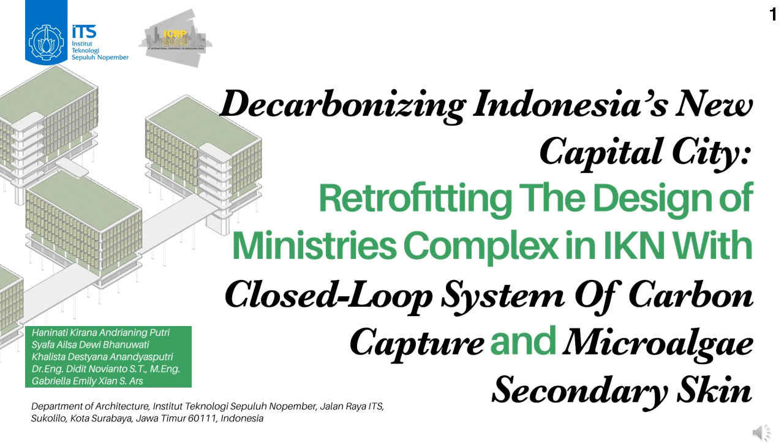Decarbonizing Indonesia's new capital city: retrofitting the design of the ministries complex in the IKN with a closed-loop system of carbon capture and microalgae secondary skin. Indonesia has finalized the agreement to shift its capital city to East Kalimantan, a move that will result in substantial carbon release.

Comparing this to DKI Jakarta, Indonesia's current capital, which emits 206 million tons of carbon annually. When extrapolated into individual contributions, the anticipated residents in the IKN area will generate a certain amount of carbon. With a projected population of 1.6 million people by 2024, carbon emissions will multiply by 11-fold. Despite varied efforts planned by the IKN regional government, including reforestation, renewable energy adoption, and energy conservation, these measures might not suffice to counter the alarming rate of carbon emissions.

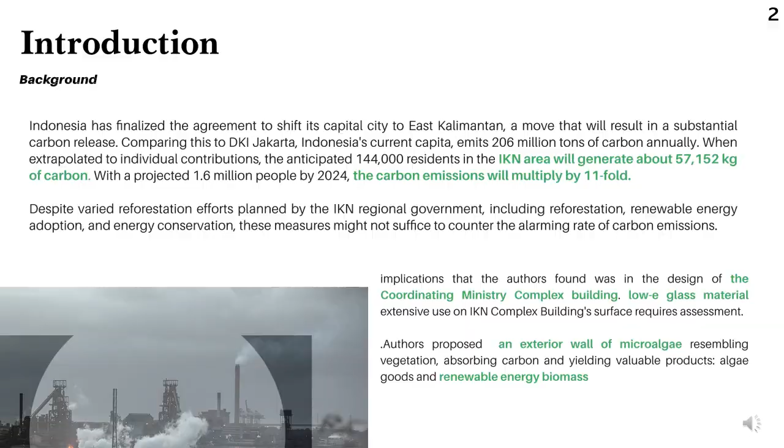One implication the authors found was in the design of the coordinating ministry complex building, where low-E glass material will be used extensively, which requires assessment. The authors proposed an exterior wall of microalgae resembling vegetation, absorbing carbon and yielding valuable products such as algae goods and renewable energy biomass. This leads to a literature review on microalgae and photobioreactors.

Here are the characteristics of microalgae: as long as there is sunlight, microalgae can photosynthesize and grow in saltwater, brackish water, and freshwater. Microalgae is abundant near IKN, located only 100 kilometers away from the zero point of IKN at Muara Badak waters.

Photobioreactor characteristics: a photobioreactor refers to the process of utilizing sunlight to convert organic materials into biomass. The application of algal photobioreactors is the panel-type photobioreactor, which makes effective use of land such that it can be integrated with the facade. The length of the panel can vary according to the desired volume and surface area, but the depth should be constant as it relates to light penetration.

Light is a major factor for microalgae growth in photobioreactors and should be given special emphasis in the design of PBR facades. Solar trackers with automatic control units can be used for tilt angle adjustment, and sprinklers are used to cool down the PBR volume.

In Indonesia, Martokusumo et al. explored microalgae facades for the ITB Innovation Park in Bandung in 2017.

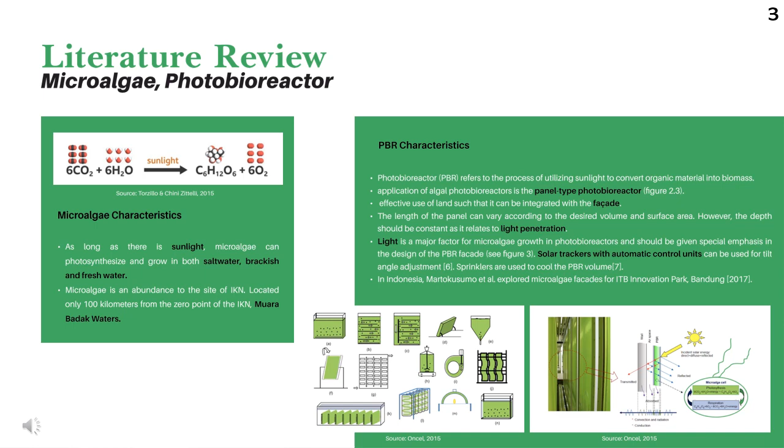Literature review on direct air capture: direct air capture technology extracts carbon dioxide from the air to create various products like carbon neutral fuels and food, aiding in achieving net zero emissions.

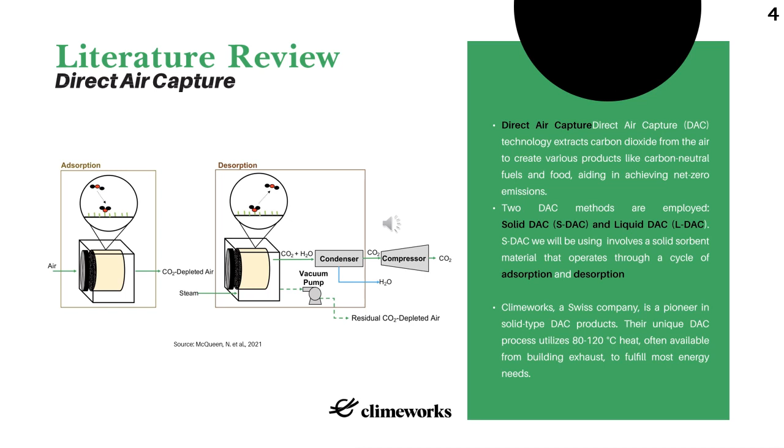Analysis and discussion from IKN's current plan: implementing low-emissivity glass on IKN office buildings offers advantages. Low-E glass serves as solar control, shielding indoor spaces by reflecting excess solar heat, while preserving natural sunlight access and promoting natural lighting indoors.

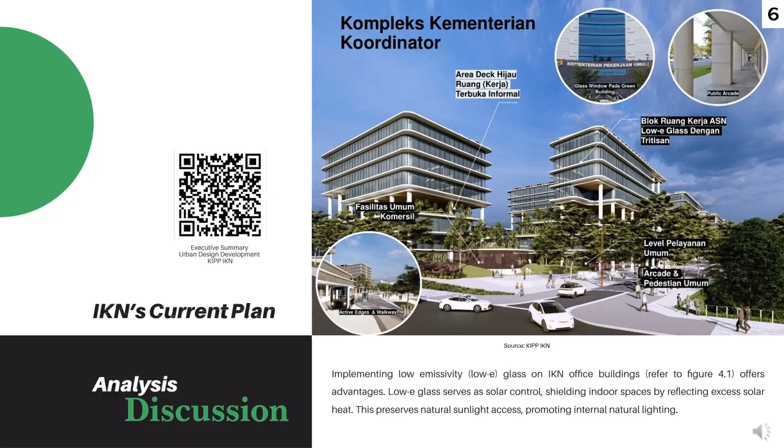Discussion on cutting carbon emissions, including with low-E glass, references a UK case study in a four-season climate, mirroring Indonesia's warm, humid conditions, especially during the summer. The graph on the slide shows the carbon emission comparison between different types of glass in the UK.

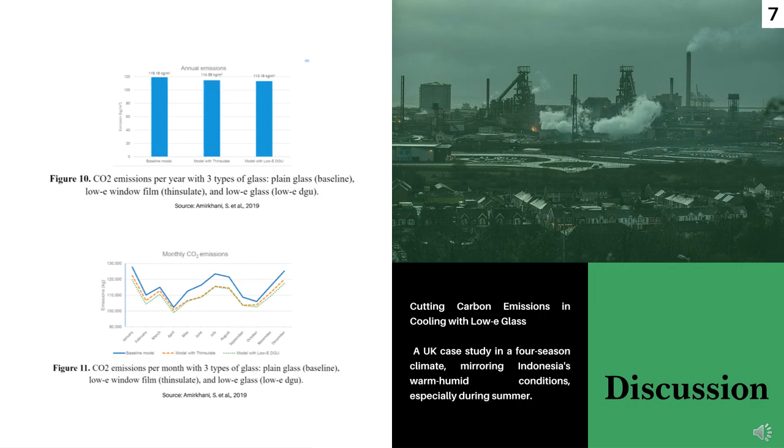Discussion on cooling load assessment: assuming a common VRF system is used, emitting a stated amount of CO2 per 1 million BTU over 20 years, the BTU load per floor is as stated, and each floor will produce a stated amount of CO2 for air conditioning, or a stated amount of CO2 per building. We can then compare the carbon reduction from air conditioning achieved by low-E glass versus the carbon reduction achieved by direct air capture.

The use of low E-glass will reduce carbon emissions by a stated number of tons of CO2 per 20 years, or a stated number of tons of CO2 per year, reducing carbon emissions by 4.1% to 5.3%.

To capture 1 million tons of CO2, the DAC system will require 0.4 to 66 square kilometers of land. Its application to IKN, with calculations stated in the slide, shows the buildings have the potential to reduce carbon from a stated number to a stated number of CO2.

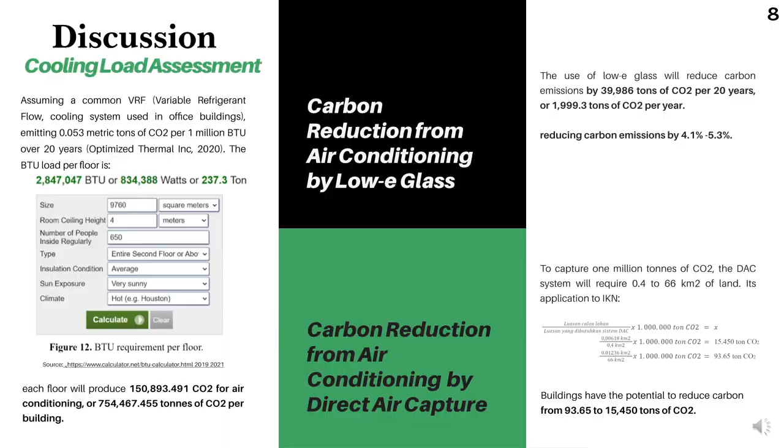Availability of microalgae in East Kalimantan. A Berau water study found diatoms as the dominant microalgae. Results also connected microalgae prevalence with chlorophyll A levels in Kalimantan Berau waters, as highlighted by Aryawati and Toha in 2011. This supports the suitability of microalgae solutions aligning with local resources.

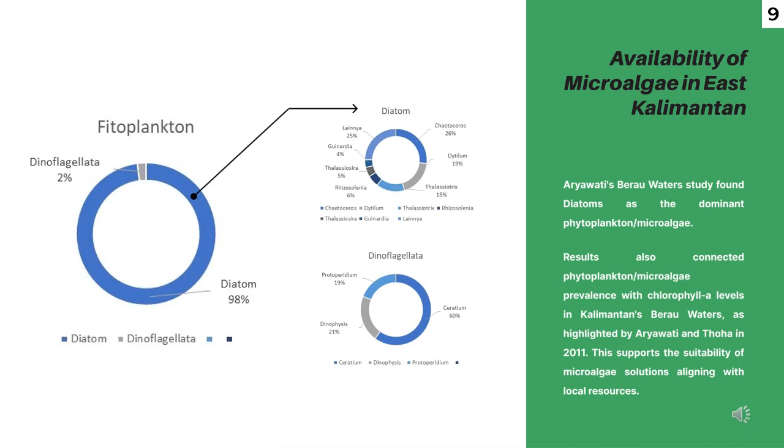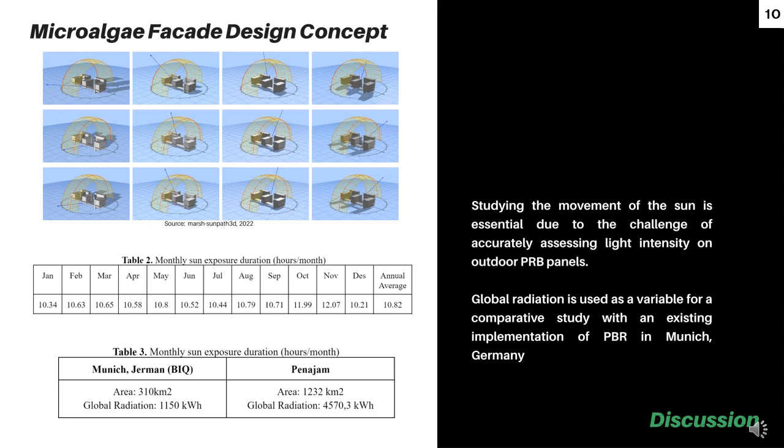Microalgae facade design concept: studying the movement of the sun. This is essential due to the challenge of accurately assessing light intensity on outdoor PBR panels. Global radiation is used as a variable for a comparative study with an existing implementation of PBR in Munich, Germany. The calculations are stated on the slide.

A conceptual diagram shows how the DAC and PBR technology will be implemented in a closed-loop system. These are the steps to the process. First, the DAC system captures CO2 from air and transports it to microalgae PBR panels via CO2 pipeline.

Second, nutrients, sunlight, and CO2 enter microalgae PBR panels, generating heat, microalgae, used water, oxygen, and biomass. Third, generated heat will be redirected into the DAC system. Fourth, the produced oxygen is released into the surrounding air.

Fifth, biomass can be processed to become electricity, which, according to the IKN plan, can be channeled back to JPCI IKN Smart Power Grid so that it is stored for shared use by the city.

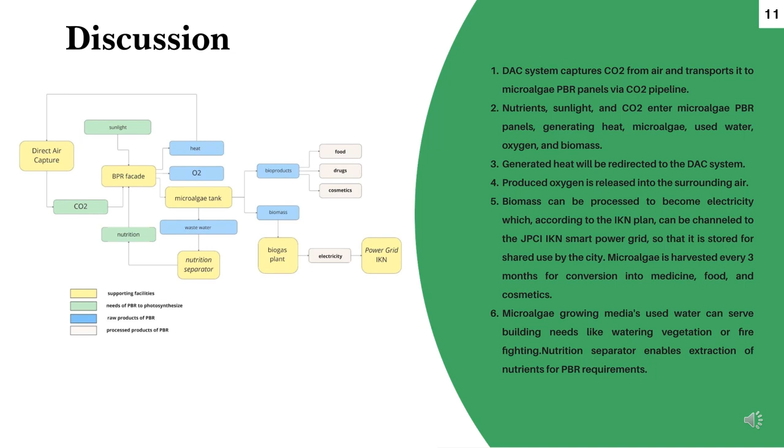Microalgae is harvested every 3 months for conversion into medicine, food, and cosmetics. Sixth, the microalgae growing media's used water can serve buildings' needs like watering vegetation or firefighting, and a nutrition separator enables the extraction of nutrients for PBR requirements.

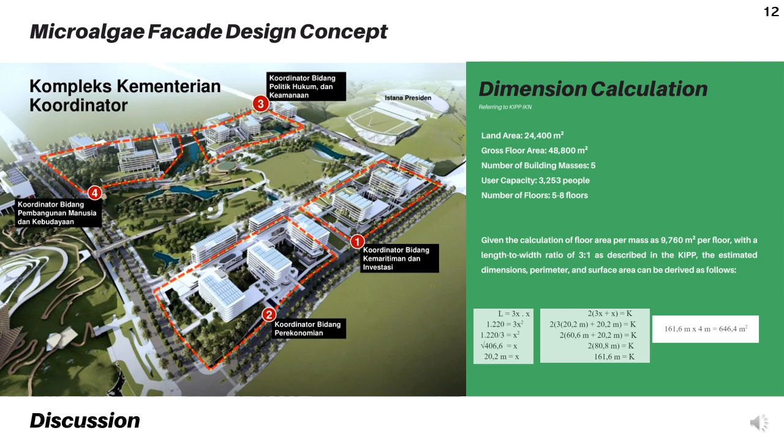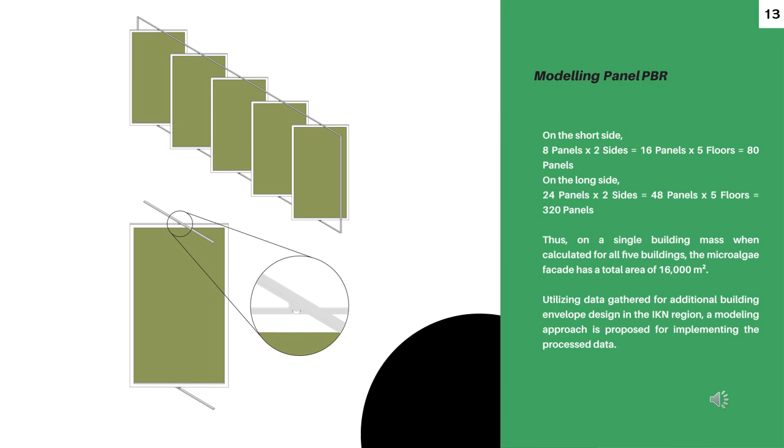Microalgae facade design concept: dimension calculation. The dimensions for the panels are calculated using different variables for the building. PBR panel modeling utilizes the data gathered for additional building envelope design in the IKN region, and a modeling approach is proposed for implementing the processed data.

Inevitably, the integration of these technologies will still have embodied carbon. The first source is from the DAC transportation. Using cargo transportation from the port of Zurich, assuming the volume of the DAC and a requirement of 18 units, the carbon produced by the DAC transportation will be as the number stated.

The second source is from the construction and operation of the PBR, calculated through its materials and operations. The photobioreactor will embody a stated number of CO2. The total embodied carbon is as the number stated, and the direct air capture amounts to 4,000 tons of CO2 per year, meaning the carbon debt should be paid off in less than a year.

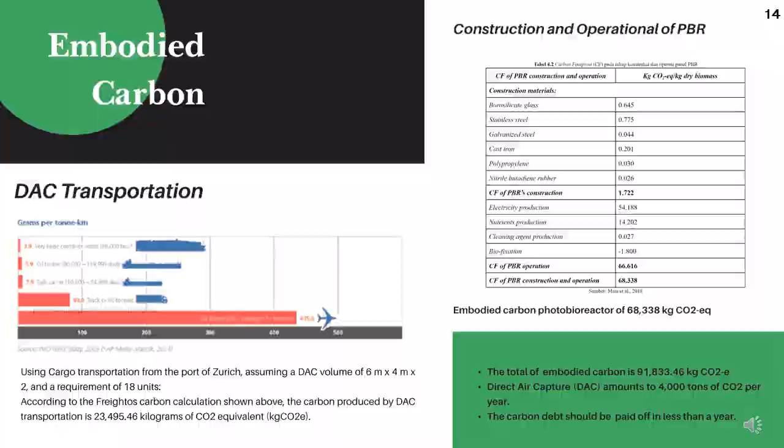In conclusion to the paper: Number 1, the capital city relocation to IKN involves significant carbon expenditure, while IKN aims for sustainability, architectural innovation is lacking. Number 2, East Kalimantan's abundant microalgae holds potential as a breakthrough material, proposing DAC and PBR integration for carbon reduction and energy generation. Number 3, feasibility was tested by comparing pre- and post-microalgae skin carbon reduction.

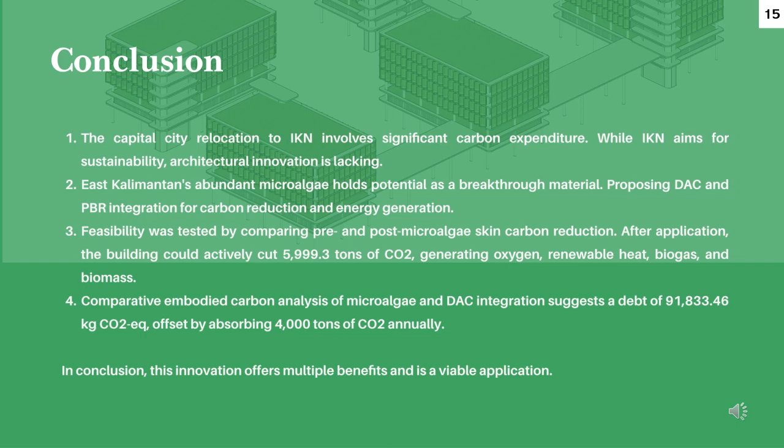After application, the building could actively cut almost 6,000 tons of CO2, generating oxygen, renewable heat, biogas, and biomass. Number 4, comparative embodied carbon analysis of microalgae and DAC integration suggests a debt of a stated number of CO2 offset by absorbing 4,000 tons of CO2 annually. In conclusion, this innovation offers multiple benefits and is a viable application.